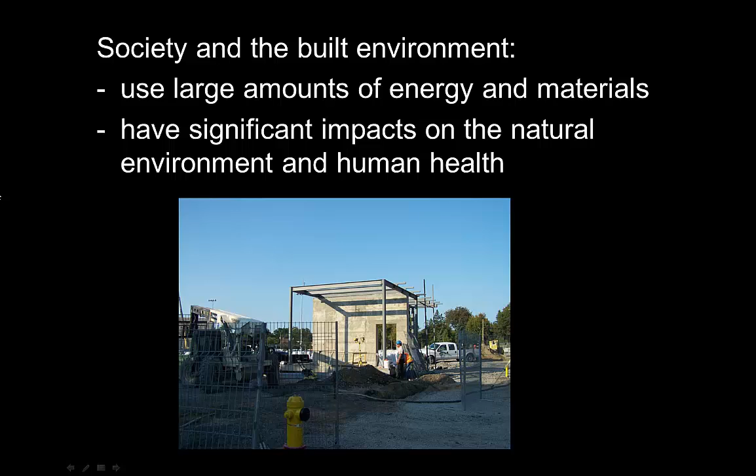As we started to discuss in the last lecture, the things that engineers design and build use large amounts of energy and materials, and so have significant impacts on the natural environment and human health. There have been many attempts to quantify some of those impacts, and I'm going to focus specifically on buildings.

As one example, this is a study specifically related to Canada, the Royal Architectural Institute. Their research showed that the design, construction, and operation of buildings are the main sources of demand for energy and materials out of any sector in Canada. In fact, according to their numbers, buildings account for nearly half of all greenhouse gas emissions in Canada.

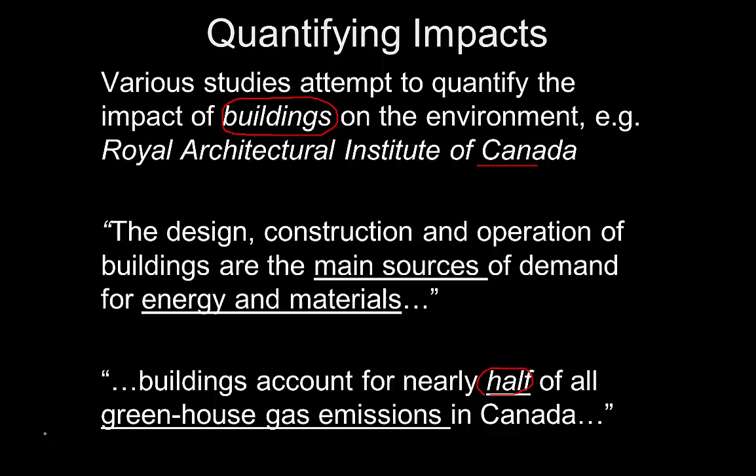As we move to the United States, this is a study from the U.S. Energy Information Administration in 2009. Their numbers indicate that the building sector accounts for about 26%, a little bit less than the Canadian study, of carbon dioxide emissions.

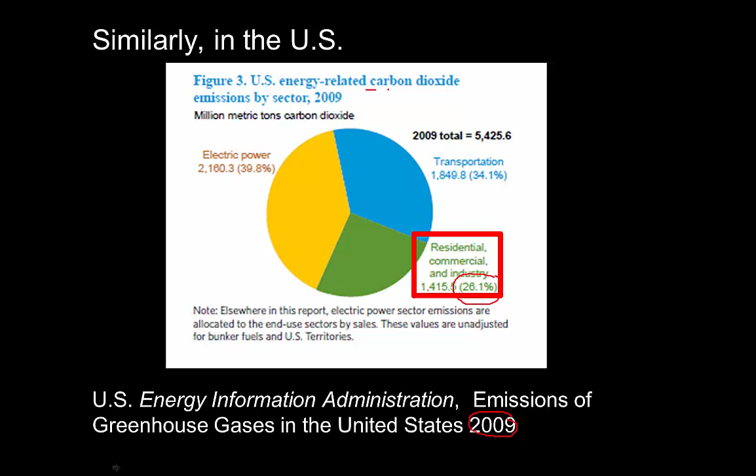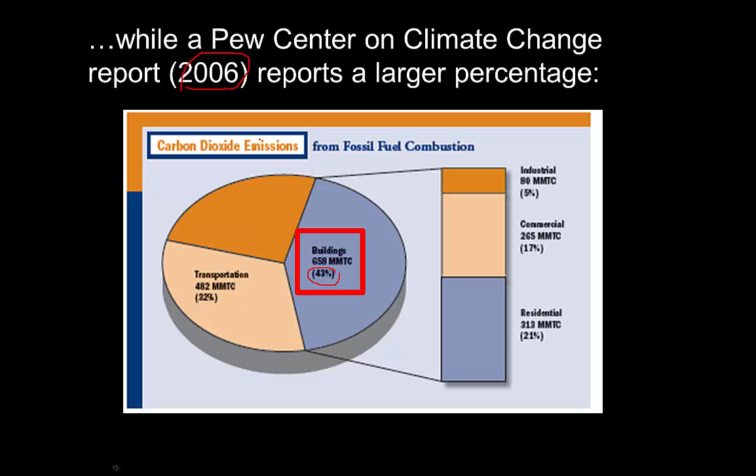Still sticking with the states, this is another study, in this case from 2006, a Pew study. The sector that they identify as buildings, they say accounts for about 43% of carbon dioxide emissions.

Back to Canada again, this is another Canadian study, in this case from Environment Canada, published in 2013. They were tracking greenhouse gas emissions for various different sectors, and they have one sector identified as buildings. They tracked greenhouse gas emissions, megatons of carbon dioxide equivalents over a number of decades. But specifically, if we look at more recent data, the amounts of these emissions related to buildings actually only account, according to their numbers, for about 12% of total greenhouse gas emissions.

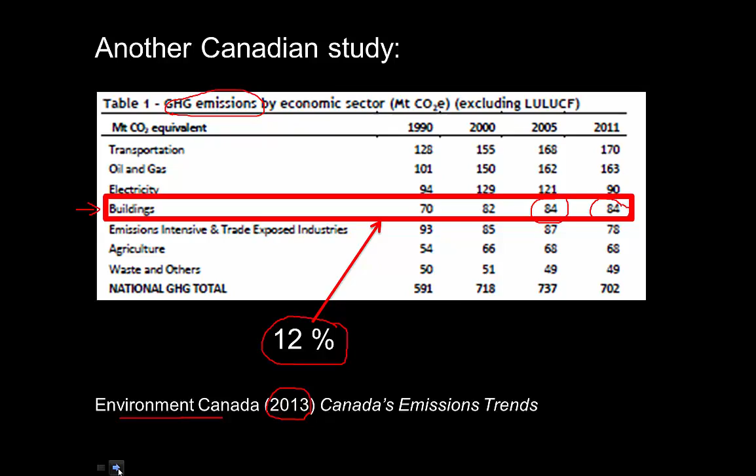So what do all these different studies tell us? There are obviously some different numbers out there, a whole range of estimates of the impact of buildings on the environment in terms of greenhouse gas emissions, which we know can be related to climate change. Why these different numbers, and which one is right?

Well, keep in mind that in each of these different studies there may be different accounting methods, so what specifically they define as buildings and how much is accounted to buildings may differ. Some of these papers you actually find it's a bit difficult - they are not really explicit in terms of how they define what a building is and what falls into that category. Of course, different countries, we can expect some differences in terms of impacts in different sectors. And certainly even in this comparison between two countries, Canada and the States, we see some different numbers.

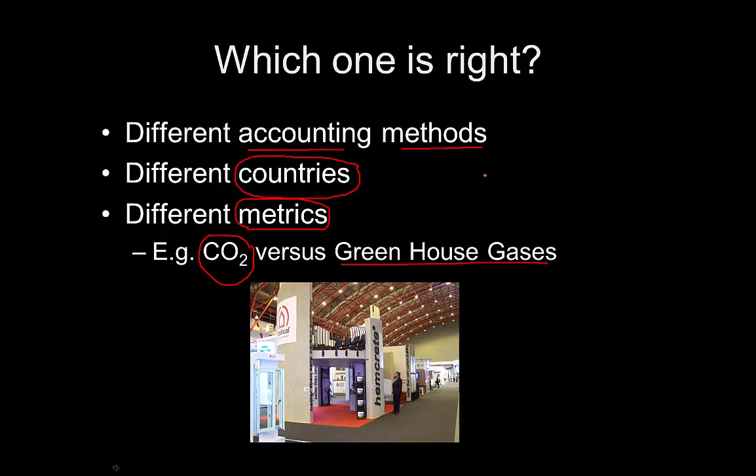And of course, there are some different metrics in the different studies that I described - they're using some different metrics. For example, carbon dioxide emissions are somewhat different from total greenhouse gases or greenhouse gas emissions. So the main point is we have some different studies, some slightly different numbers, and in fact in some cases some wildly different numbers. But regardless of which numbers you look at, there is little doubt that we can identify some big impacts in terms of energy, in terms of greenhouse gas emissions that are related to the buildings that we as engineers design and that society operates.

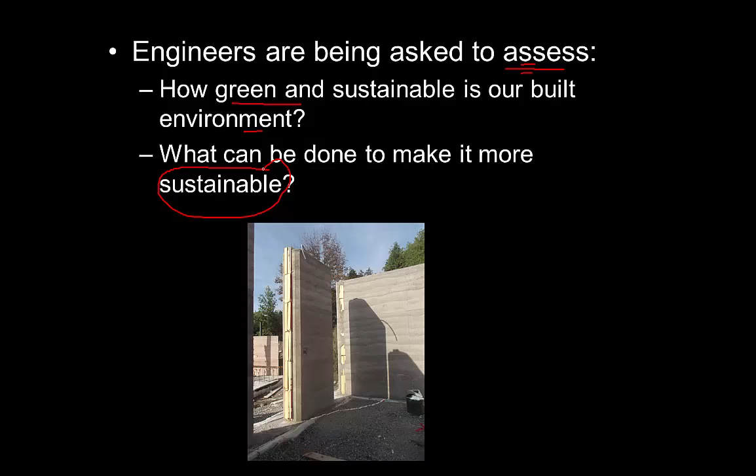So given that large impact, engineers are being asked to actually assess that impact and to assess how green and sustainable our built environment is, and really to try to come up with ways of making it more sustainable in the future. And so all of this is really the motivation for some tools that have been developed in about the past 20 years that fall under the title of building assessment methods. These tools have been developed as a way to try to quantify the sustainability of a building project.

There are two main groups of these building assessment methods: the first are qualitative tools, and the second are quantitative tools. Qualitative tools involve developing some criteria and scores, so a little bit simpler to use, as we'll see. Quantitative tools are more holistic - these tools try to use a full life cycle approach with input on the materials and the energy that's being used to come up with some way of measuring the impact of that building over its entire life, the impact that it will have on the environment.

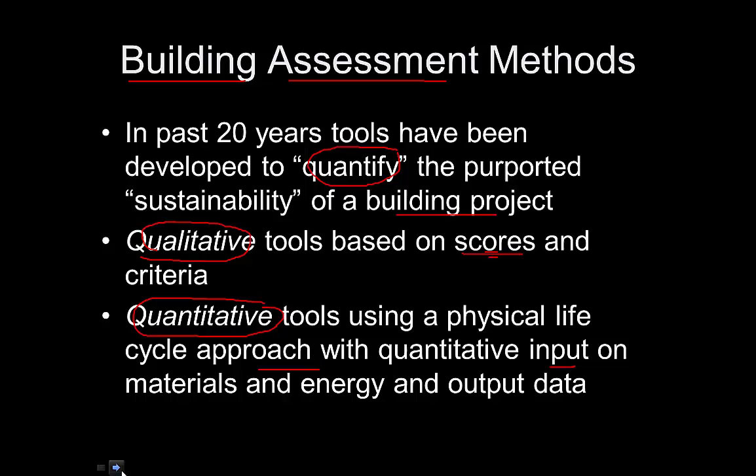Some of these can be quite complex to try to quantify, and the timescales we're looking at are long. So buildings, at a minimum, will have a design life of 50 years, and often are expected to last much longer than that.

All the way from things like the materials that we use and how they're actually acquired, how they're extracted, how they're transported, will have different impacts on the environment. The actual construction process itself will have impacts. And then, of course, the operation, the energy that's needed to use that building and maintain it has impacts on the environment.

But at the end of the life of that building as well, there are a whole other host of impacts as that building is demolished and as materials are removed. What happens to them? Are they placed in a landfill site? Are they recycled? All of these will have some different environmental impacts.

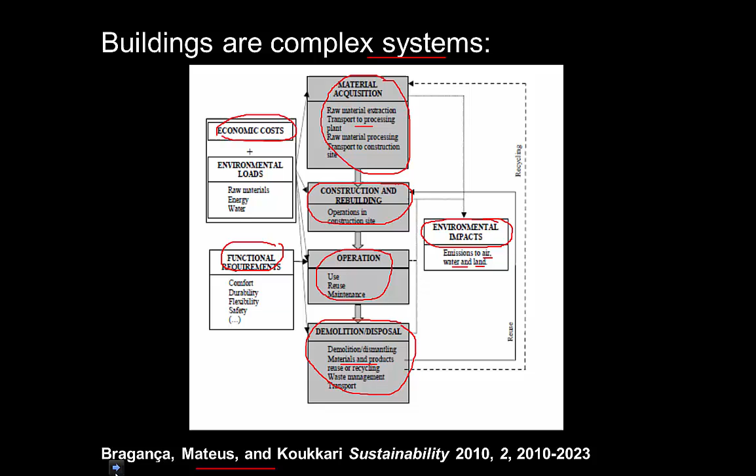Instead, to a great extent, the industry has turned to this second group or type of building assessment scheme, which we refer to as qualitative schemes. These are much simpler, and basically what happens with these schemes is that certain parameters are identified as what the authors or developers of the assessment scheme believe to be the critical parameters.

These are typically things like the site that's chosen, the potential of the site. In some cases, they may try to address things like preservation of regional cultural identity. One critical one often looked at is energy consumption, trying to minimize that, as well as protection and conservation of water resources. They'll also often try to encourage the use of environmentally friendly materials and products.

Also trying to ensure a healthy and convenient indoor climate, so looking at, for example, the indoor air quality. And of course, looking at maintenance practices and trying to improve the operational and maintenance practices.

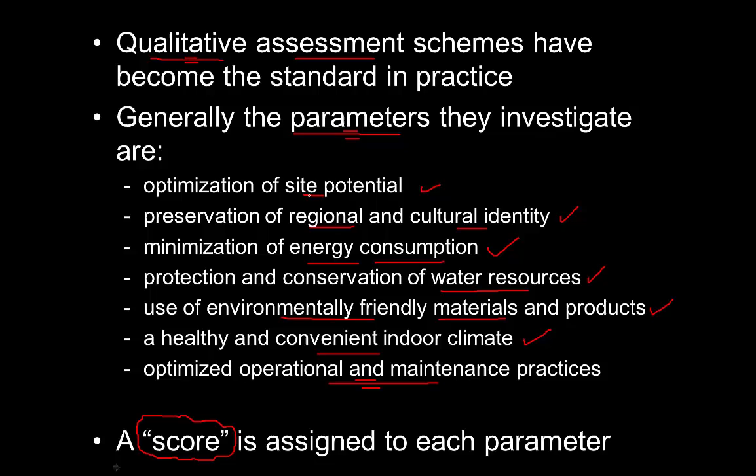So they kind of identify these various different parameters, and what they come up with is what we can very crudely refer to as a score. You sort of get a score for how well you improve the environmental friendliness or the sustainability of each of these different parameters.

There have been, over the years, really these things developing over the past 20 years. There are many of these methods that have been proposed and developed. But what you're finding is that increasingly many of them are falling by the wayside...

...and there are really just a few, two major international assessment schemes that are really coming to the forefront and that are being used by the majority of engineers and those looking at the sustainability of buildings.

Why is this happening? There are a number of reasons, and these authors, if you're interested, have a really interesting paper on these building assessment schemes, going into more detail about the history of this. But one of the main reasons is this idea of brand recognition.

So as engineers work increasingly in different countries, they want to be able to use an assessment scheme that is easily identified and recognized in other countries. And side by side with this is the desire for international standards, standards that will be accepted across a wide variety of different countries.

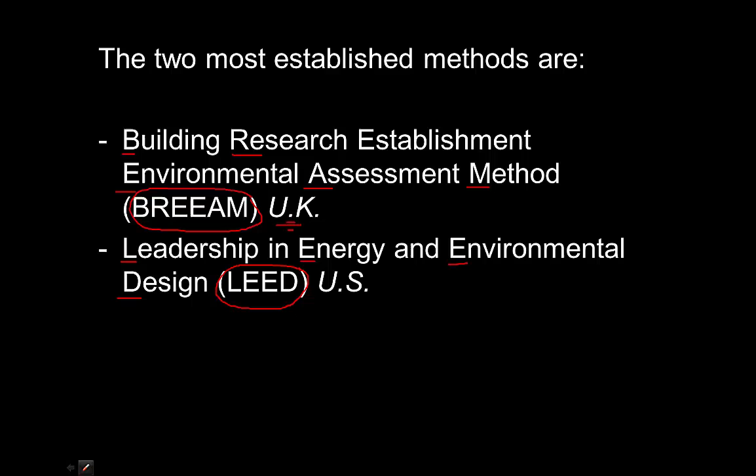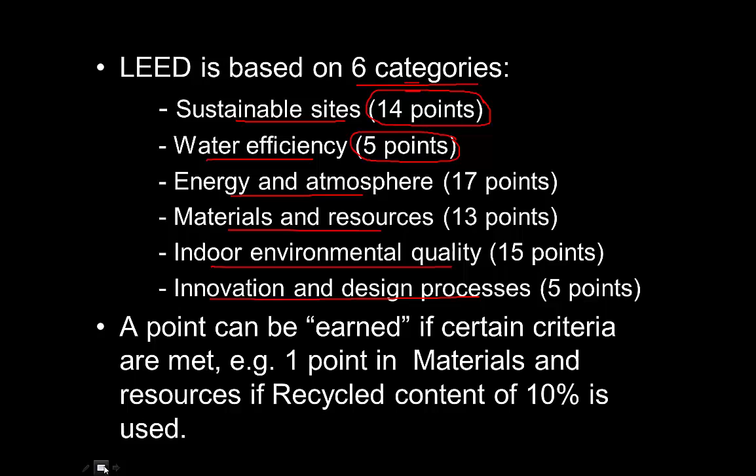Each of these categories has a variety of different criteria - we'll look at that in a minute - and if you meet those criteria, you earn points within that category. Let's look at this example from Da Silva and Ruwanpura, a 2009 paper. Lots of interesting stuff is being developed in the literature around some of these assessment schemes.

If you want more information, some interesting published and peer-reviewed literature, go to the literature and take a look at what some of the researchers are saying out there about these assessment schemes.

Building reuse - so if you're taking existing building materials, building components, and implementing them in the design or construction of a new building. Construction waste management - diverting different percentages from the landfill.

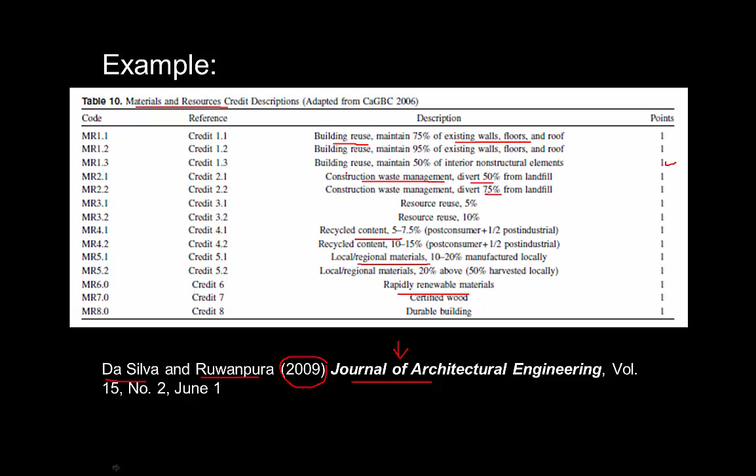Now, the reality is that some of these are quite easy to achieve, others not so much. So they looked at a whole host of different LEED projects that had been certified.

The different colors here indicate different levels of certification that LEED identifies. Gold and platinum certification is the highest certification you can reach. Silver is kind of in the middle. Certified is the lowest.

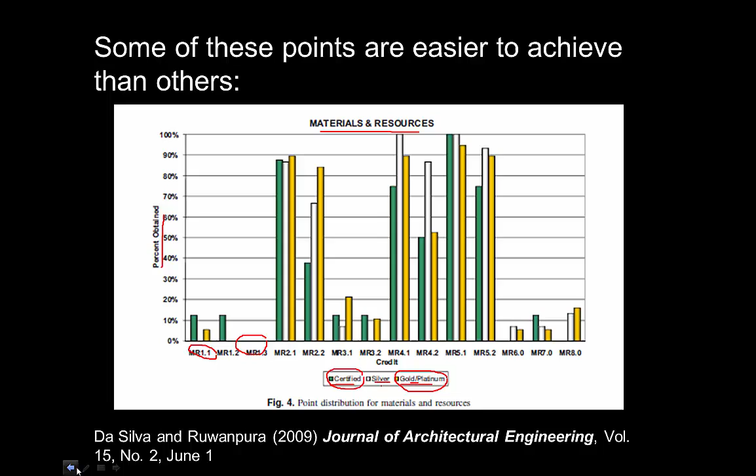So the question is why? To give some examples: this waste management points, virtually everybody, close to 90% of the projects, are achieving that. The recycled content, 90 to 100% are achieving that. The local regional materials points.

Okay, why might that be? Well, for waste management, many municipalities already have systems for recycling materials, diverting materials away from landfill. So that's already in place. It makes it pretty easy on a construction project to just follow the normal recycling procedures and claim your point. Recycled content, some of this is already pretty standard.

For example, concrete currently uses, certainly in North America, Canada, the U.S., a lot of fly ash to offset the amount of cement. Fly ash is, of course, considered a waste material from the burning of coal, and in the past, in the 1970s and 80s, it essentially would have just been diverted to landfill. It's now being mixed with cement and used to offset cement. So it's pretty easy to achieve or say that, yes, I'm using 10 or 20% recycled content in my building materials.

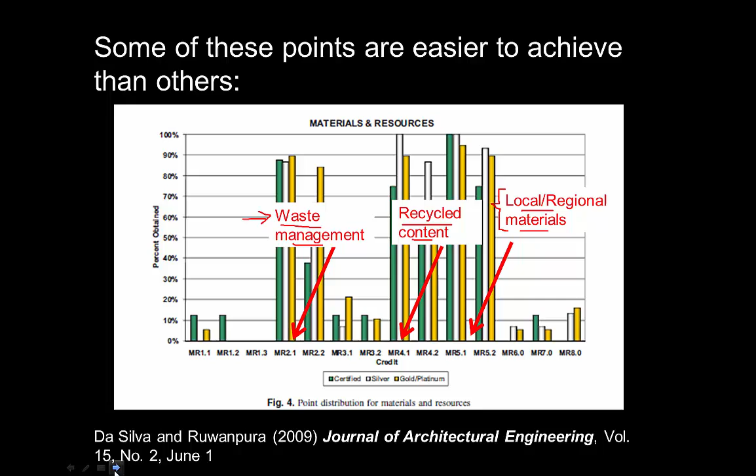So all of that is just to say that the idea is to encourage sustainability, but you need to dig down a little bit deeper to see whether people are really making changes and really making improvements as they try to achieve this LEED certification.

So to sum up how LEED does this: they look at all these different categories, the different criteria that you've met, and you get various points. All you do is add them up. You'll get a certain total number, and then depending on where your total score falls in this range, you see pretty random ranges of points, and they will give you certification. As I mentioned, the lowest is certified, the highest is what's referred to as platinum.

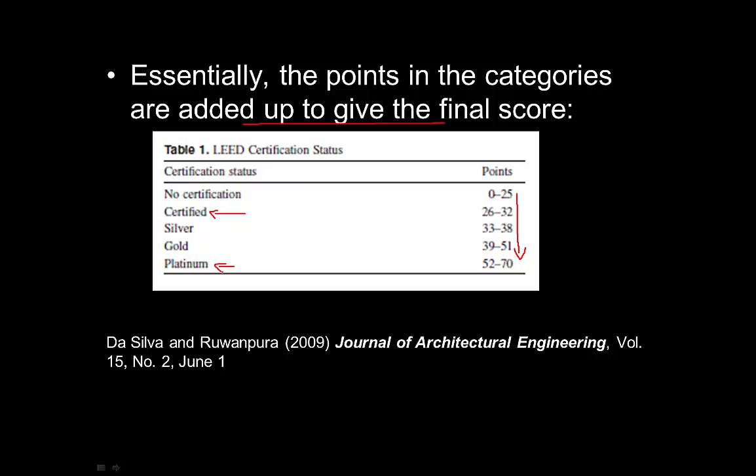So these assessment schemes have become very popular. Many municipalities now require buildings, municipal buildings, to be LEED certified, for example in Canada. But there are many criticisms, and as engineers we should keep these in mind as we're using these and considering what they really tell us about sustainability, and whether they're helping us to really achieve sustainability.

So again, going back to this paper by Da Silva and Ruwanpura, one of the things they say is that technical merit is only one of many factors considered in the importation of assessment methods, and these decision processes are often not well documented. What do they mean by that?

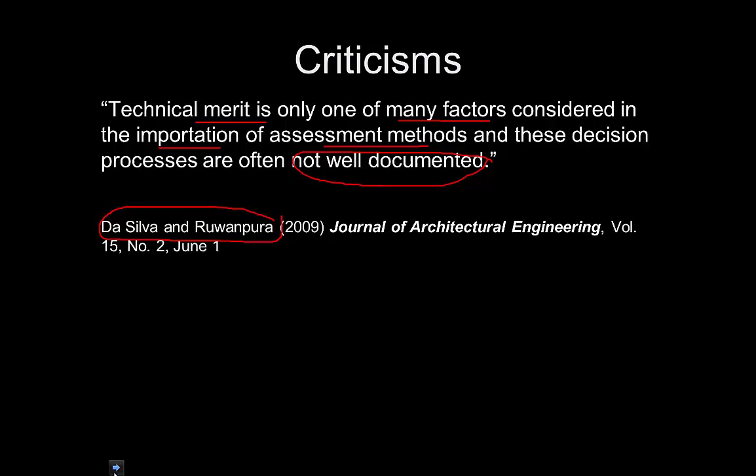So these different categories that LEED, for example, is using, why those categories? What is the connection between those categories and the different criteria that they're specifying and actually achieving a more sustainable building system?

In fact, as you start to dig into some of these categories, you realize that there are things that really don't make sense. So in this materials category, for example, they have rapidly renewable materials. If you use rapidly renewable materials, you get a point.

One rapidly renewable material is bamboo. So designers have sometimes specified bamboo flooring, and you get a point from LEED for that. But that very much is not a regional material if we're talking about Canada. This would be imported from Asia, and so it really contrasts with the goal of trying to obtain local materials and reduce the transportation of materials from long distances and the resulting emissions from transporting them. So there can be some real paradoxes and contrasts in some of these points that are awarded.

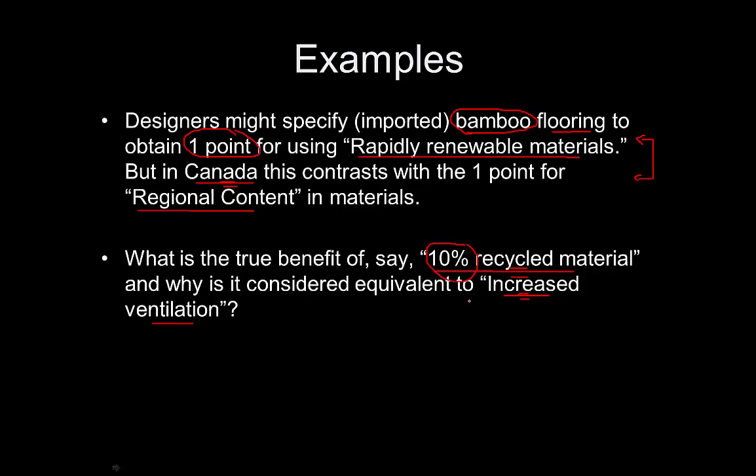And why these different numbers? For example, 10% recycled material, you get a point for that. What makes that equivalent to, say, increased ventilation, which you would also get a point for? And using 10% recycled material versus having increased ventilation, what impact does that have long term on the sustainability of that building, and on a global level, on actually improving our environment?

The reasoning behind these decisions in LEED is not clear. There's not a lot of information provided by LEED on how these decisions were made, so keep in mind that

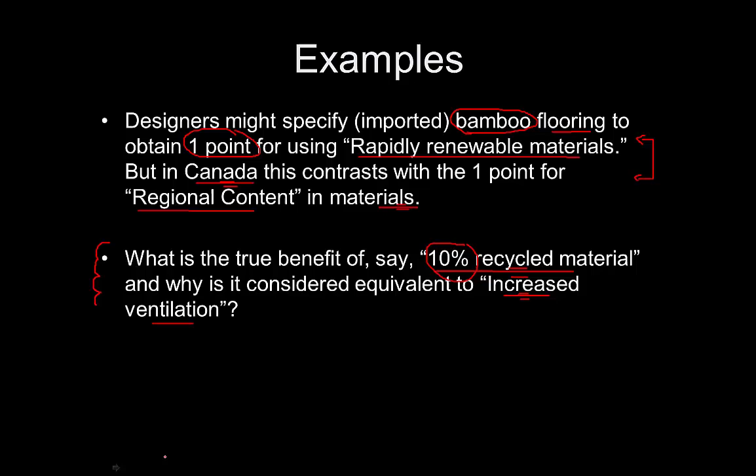oftentimes these categories and the criteria that were used were really set up not necessarily with a strict scientific basis, but on the basis of what is achievable by industry, without causing a huge impact on industry or a large economic penalty on construction companies.

Another criticism: as they say, technology is not value-free. All assessment methods carry the values and priorities of their developers, either implicitly or explicitly.

To look at some examples of this: one of the points you can earn is if you're using a LEED accredited professional, a LEED AP, on the project, you get a point. Well, it's a bit of a conflict of interest, considering you can only become accredited by taking and paying for LEED's course. So they're really basically saying, if you want to get this point, come and pay us even more money to become accredited.

Thinking back to the first lecture, the original Brundtland report, where the definition of sustainable development was first made and fleshed out, remember that the authors were pretty adamant that sustainability involves not just the technical sides of projects or development or building, but some of the broader, more complex social aspects.